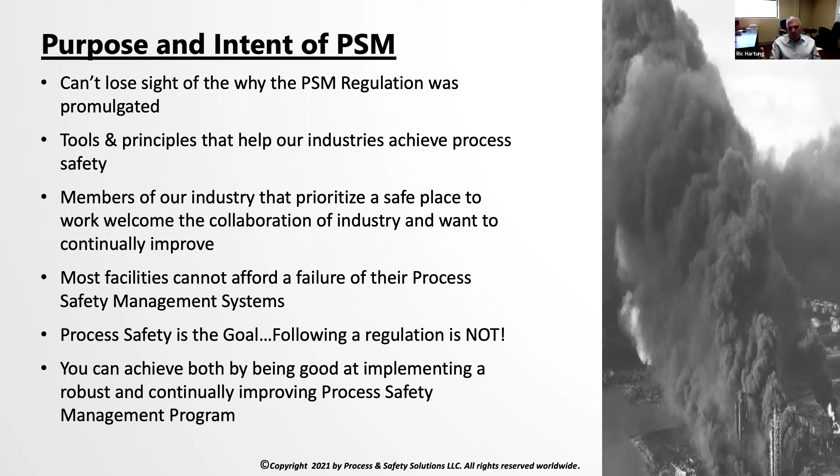And I just wanted to add, Ric, before you go on, certainly agree with Ric that process safety is the goal, but just for context for everybody, my comments will largely be focusing on compliance with the regulation. Just a little bit of a different approach from Ric, and I being counsel for these companies, my comments are going to come from that. What do we have to do to comply with the regulation? Thanks, Ric. Yeah, very good point.

Before we continue on, I just want to give you a little bit of background on this particular case and make sure we understand the case in as much detail as I can provide. I'm not going to go into the nitty-gritty details, but certainly from an overview or 10,000-foot standpoint.

So if you are familiar with a refining process, and I know we have a number of people on here that may not be in the refinery industry. You may be in midstream, or you may be in the petrochem industry, or you may be in the ammonia refrigeration industry. And we're going to hit every one of these industries as we go through this presentation, because all of this applies to every industry, no matter what processes you operate.

But from a Wynnewood standpoint, in this particular case, this involved a refinery, and the typical refinery has many operating units inside of it. You can have the crude unit, the ISOM unit, you may have gas processing, you may have an FCC, a reformer, hydrotreaters, but a number of different operations occur within the refinery. Oftentimes, each of these different operating units will have different operating personnel, and at the same time may be covered individually as a PSM facility.

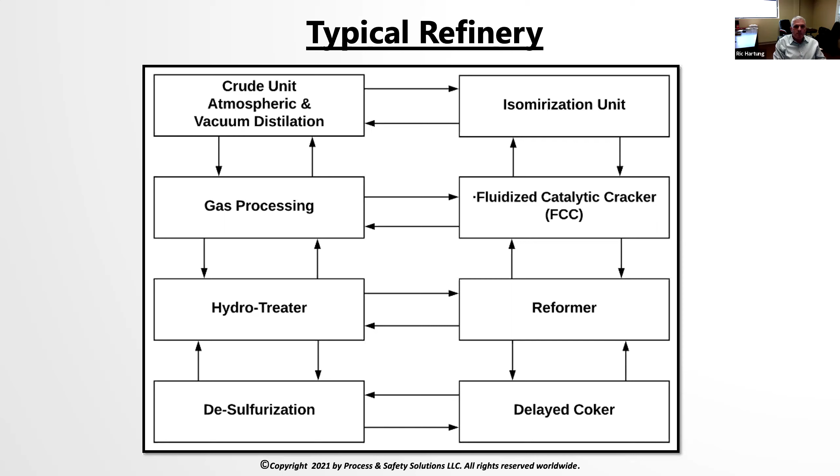Yeah, just a comment on that also for those of you on the call. Rick mentioned it. I know there's a lot of people that may not necessarily be in the refinery business or be familiar with the inner workings of a refinery. I think one of the takeaways from that slide, and really this one, is that whether you're running a chemical manufacturing process or a gas processing plant, this is similar in that we've got multiple pieces of equipment linked together, connected through piping. And so those same questions of where does it begin and end really are universal.

Yep. So this particular case was centered around the fluidized catalytic cracker, or FCC unit. In every typical refinery, as we mentioned earlier, there are several other operating units, many of them PSM covered. The FCC in general contains threshold quantities of flammables, over 10,000 pounds. And those of us who are aware, when we're dealing with PSM, PSM requires you to aggregate all your flammables. So you could have propane, ethane, other flammables within that process. We have to aggregate all of those, unlike EPA's RMP, where it's based on the listing and whether or not you have to aggregate the listed chemical or listed flammable.

So one of the flammables in this particular FCC was a byproduct called refinery gas. It is produced in the FCC. The aggregated amount, again, is the maximum intended inventory. It includes refinery gas because it is a flammable. So you can have multiple different types of flammables, refinery gas being one of those, natural gas actually being another, because they're all flammable.

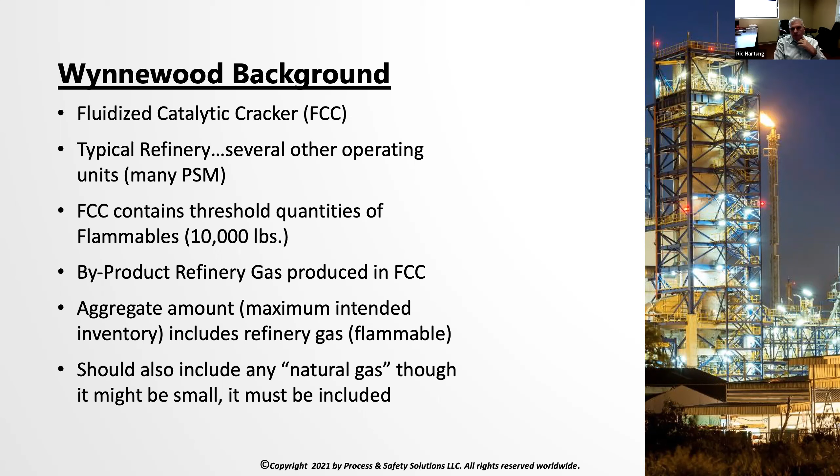So refinery gas is stored and distributed outside the FCC unit, and that's how the Wynnewood refinery was set up. The refinery gas would leave the FCC and be distributed throughout the process through a larger vessel, and we'll get into a few details of that in just a second. The refinery gas is distributed to other locations within the facility, and it's all used and consumed internally on site.

And the refinery gas storage and distribution system in this particular case was not considered PSM covered by the refinery. So the refinery said that the distribution system and the storage of the refinery gas was not a covered process, mainly because they separated it out into a process of its own. And then that process was below the threshold quantity as a separate process, below the 10,000 pounds needed to meet the threshold.

Interconnection was not considered. So what was actually taken into account was, as the pipe left the FCC, that was where the hard stop of coverage occurred. It also relied on a facility siting study on a separate process and how it affects personnel. So as most of us know, as we do a facility siting study within a facility, we're looking for the effects on personnel. We don't always look at the effects on other equipment and other processes within that facility.

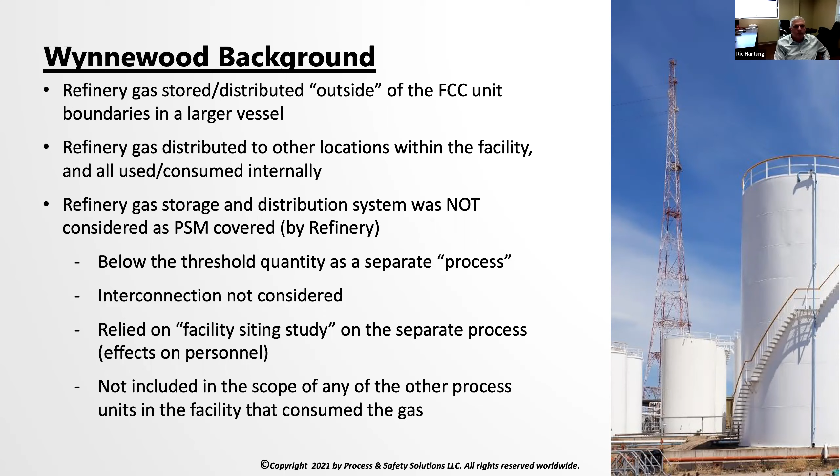So this kind of breaks it down in a little bit more detail. You have the FCC unit or process unit within the refinery. Again, the refinery gas came out of the FCC, went into a larger vessel, and then from that vessel, it was distributed to various locations, maybe flared, plant process heaters, plant utility boilers. One of those particular process pieces of equipment is the Wickes Boiler. And this is where the whole issue centered around in terms of this particular case and this particular incident.

The Wickes Boiler essentially received refinery gas. It would burn that refinery gas, produce steam. That steam would be used not only in the FCC, but throughout the other process units as well. The Wickes Boiler itself was within the physical boundaries of the FCC. May not have been a part of the FCC, but was within the physical boundaries of that process unit itself.

Also next to the Wickes Boiler, you'll see I've got a set of lines there above. That was a major pipe rack containing other HHCs and flammable materials that run through them. So what really occurred here is the fact that this boiler and the explosion could have affected those major pipe racks or piping systems that run through the facility.

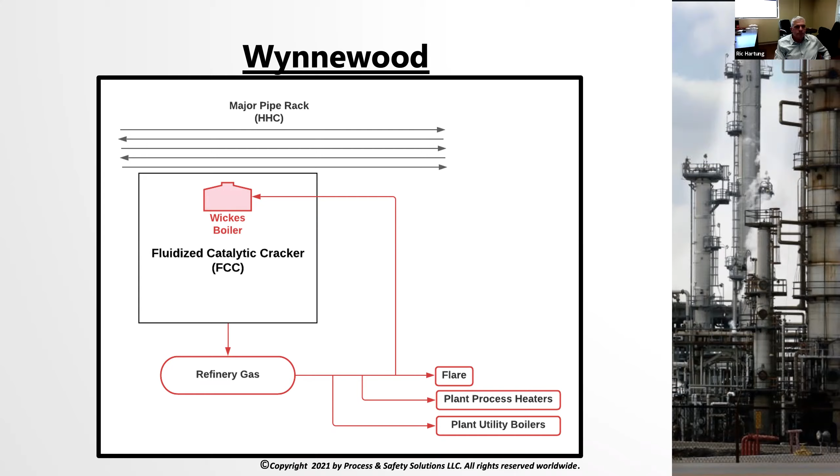Again, one user of the refinery gas was the Wickes water tube boiler, which was located in the FCC unit boundaries. The Wickes boiler again provided steam to the FCC as well as other process systems and units. And we know based on the documentation in the hazard analysis that the loss of steam could result in an upset of the FCC itself. And again, loss of steam that was produced by the Wickes boiler. And also the Wickes boiler was located next to and nearly under a major pipe rack containing large amounts of HHC as well.

At the time of the incident, the refinery was down for a turnaround. So it had been down for, I believe, a couple of weeks or more already. That boiler needed to be started back up because they needed steam for decontaminating some of the equipment to continue their turnaround. So their plan was to restart the Wickes boiler, to produce some steam using natural gas, not refinery gas in this particular case.

And Rick, on that, does that matter, right? If at the time you're not piping in RFG, instead you're using natural gas, which was not created by the facility, from a PSM scope analysis, is that important, whether at the time you are using it or whether it's just piped, and regardless whether it's coming in or not?

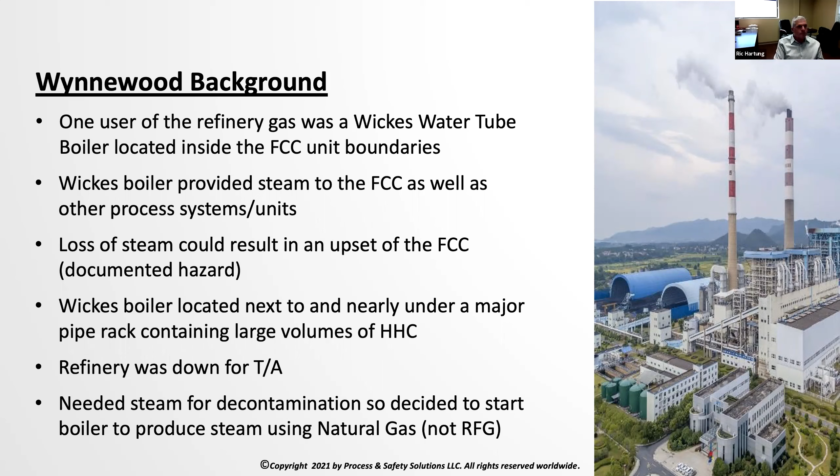So again, some more background is typically there are no HHCs in the boiler firebox. That's what we want to make sure does not happen. They're totally combusted. So from the point at which the gas comes through the burner tip, that gas should be almost totally consumed at that point in time. So we would not expect any HHCs within the firebox itself.

However, and I think this is what needs to be emphasized here, there is the potential for HHCs to be present. RAGAGEPs such as NFPA 85, and most of you, if you're in an industry that uses boilers of any type, you should be familiar with NFPA 85. It's dedicated to address this potential exactly, making sure that we have those systems and controls in place to ensure that the firebox does not contain an explosive environment.

In this particular case, this boiler did not conform to NFPA 85 requirements. All of the lighting processes and gas control were all manual. So the incident itself was gas or HHC built up in the firebox. It resulted in an explosion on September 28, 2012 that resulted in 2 fatalities. As a note here, there was a previous incident involving the same type of boiler, same Wickes type boiler, in another area plant a year and a half, 2 years prior to that. In that case, there were no injuries, but there was damage to the boiler itself.

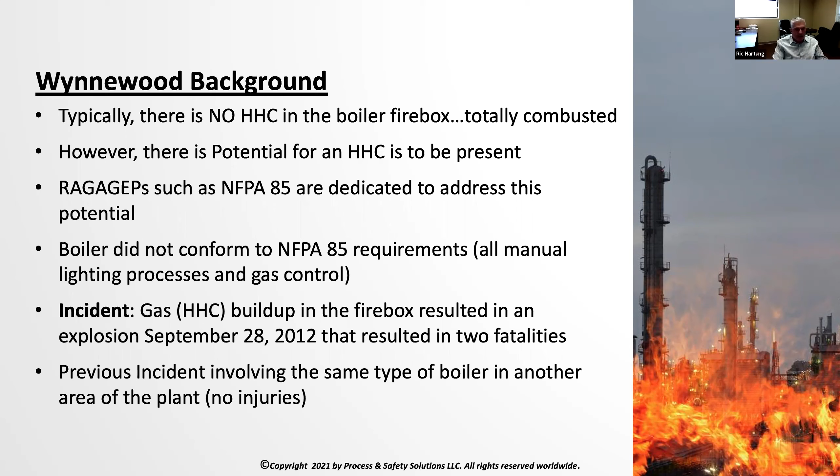So in this particular case, OSHA issued 9 PSM citations relating to the Wickes boiler. All were classified as serious, and multiple citations were also classified as repeats. The citations were challenged by the employer, mainly on the grounds that the Wickes boiler is not PSM covered, not part of the process. The boiler does not contain an HHC, and the refinery gas distribution system did not contain the threshold quantity of HHCs. Also, the employer challenged the repeat classification based on the new corporate ownership and organization. The ownership of the facility had changed approximately 2 years prior to this incident.

Ric, can you explain, given your involvement in this case and drafting the citations, the internal process at OSHA for getting these citations approved and issued? Was there any pushback or hesitation specifically relating to PSM applying to this boiler? Well, I think in general, Robert, when a CSHO does an inspection, they'll present what they believe to be legitimate citations or areas in which they have concern. Normally that will go through some type of management within OSHA itself, the area office, then the regional office. There's always some type of review that occurs.

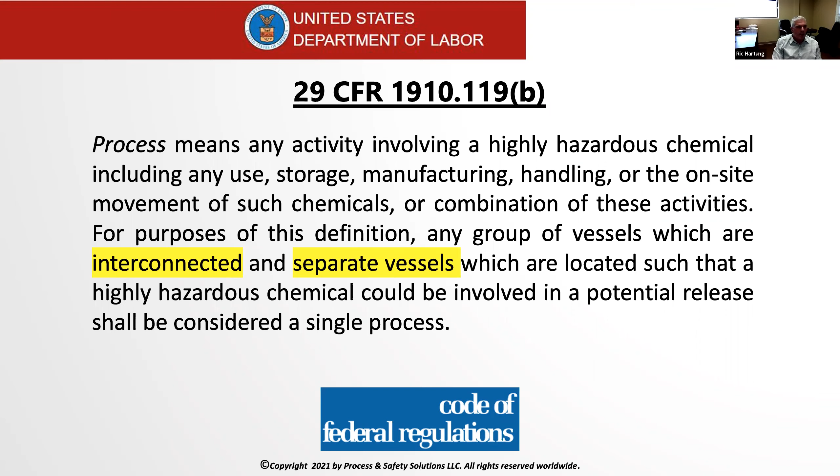So as Ric said, it is challenged by the employer. First goes to an administrative law judge or an ALJ. The ALJ finds PSM does apply to the Wickes boiler, finds that boiler is both interconnected and located such that an HHC can be involved in a release. So here it finds both elements are met.

It also, and this isn't going to be the focus of this presentation, but just for context, the ALJ also vacated the repeat classification based on, Ric alluded to it earlier, the change in ownership, and looking at the substantial continuity test that found that enough had changed, especially at the EHS level and management level, that these should not be classified as repeat. Again, we're not going to go into that in more detail today. If you have questions on the substantial continuity test or that repeat classification, please feel free to reach out.

So from the ALJ it goes to the Review Commission. The Review Commission affirms the ALJ's decision, finds that PSM does apply to this Wickes boiler. And they go into a fair amount of detail about interconnected. What does interconnected mean? And it's, in my opinion, a pretty broad definition that the Review Commission puts forth, in that they say that if you have an indirect physical link, that is sufficient for PSM coverage.

They go into the difference between the word connected and interconnected, right? They say here the word is interconnected, and we're going to interpret that to mean it can be any indirect physical link. It does not need to be right next to it. It doesn't need to be vessel A, pipe, vessel B. Any indirect physical link is sufficient. And again, down here, just using some of their language, it also doesn't need to be involved with the FCC or the alky unit or another PSM process. If it's got an indirect physical link to that process, that can meet interconnected.

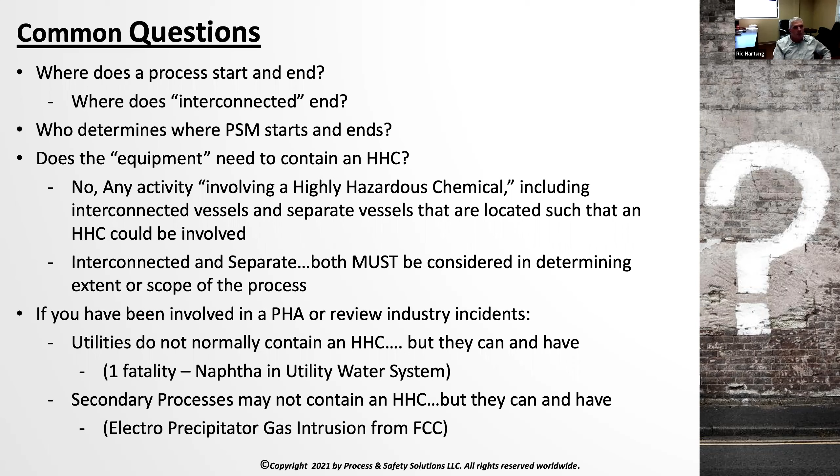Okay, somebody said, I've been out of the oil industry for a while, but while I was in it, we did not consider the tank farm as covered area. Has this changed? I think that goes into the atmospheric storage tanks question again. And hopefully I'm going to cover that here in just a minute. If I don't, let's come back to that one, Marla, and make sure we address that.

Okay. Do you foresee OSHA using this opinion to argue PSM coverage for atmospheric storage tanks? Is that the same? Are we on the same line? Sorry, Marla, my fault. Yeah, that's the same question. Hopefully we'll address that here in just a minute, because that is a very important thing to remember. There are like three of them that are interconnected here. Okay, so I think you're going to address them all. So I'm going to go ahead and finish, and hopefully we're going to address that here in just a second.

All right. So PSM, the extent of coverage, it's not always straightforward, as we're beginning to see. Obviously, there's some things that we have to do within our facility. Not every facility is the same. Doesn't matter whether you're ammonia refrigeration, a refinery, a chemical plant, specialty chemicals. It's not always straightforward. If you have just one process, then it's fairly straightforward: cover all of that equipment within that process.

What if the HHC leaves one process but stays on site? Where does it end? What is the scope? Again, you have to determine that. And if we look back at what we just said in terms of this FCC, they put the hard stop as it left the unit.

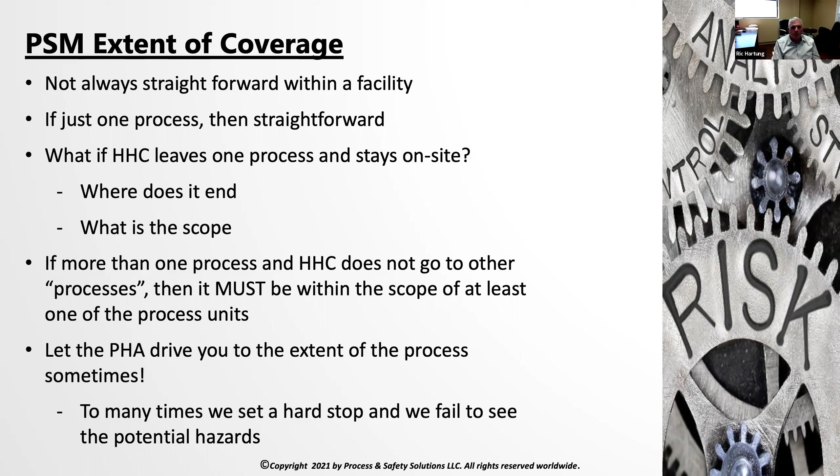Other examples I think that we need to consider here, and this is where we're going to get some discussion. I know equipment that is owned by others, we've already talked about that. If connected, still part of your covered process. I will tell you that we have several clients that have 5 or 6 different companies operating within the same facility, all owned by somebody else, all being operated by somebody else. It doesn't matter. It's going to be PSM covered. Ownership doesn't play a role per se when it comes to PSM coverage.

A lot of times with chain of custody meters they'll say, well, that's a chain of custody meter. It belongs to so-and-so. If it's on site, then it's equipment that would be involved in PSM. Pipelines is another one, owned by others, storage, caverns, etc. Those, if they're on site, still PSM covered. We already talked a bit about ammonia refrigeration facilities with multiple machine rooms or split systems and making sure we're addressing those.

Also, PHMSA, Pipeline Hazardous Material Safety Administration, versus PSM. Who has regulatory jurisdiction? Well, right now, I think, Robert, you can chime in here too. This is a pretty gray area in terms of who has jurisdiction. I will tell you, when you look at the preamble, PSM establishes PSM coverage in your facility based on threshold quantities. If you've got pipelines within the site, those are PSM covered based on the preamble itself.

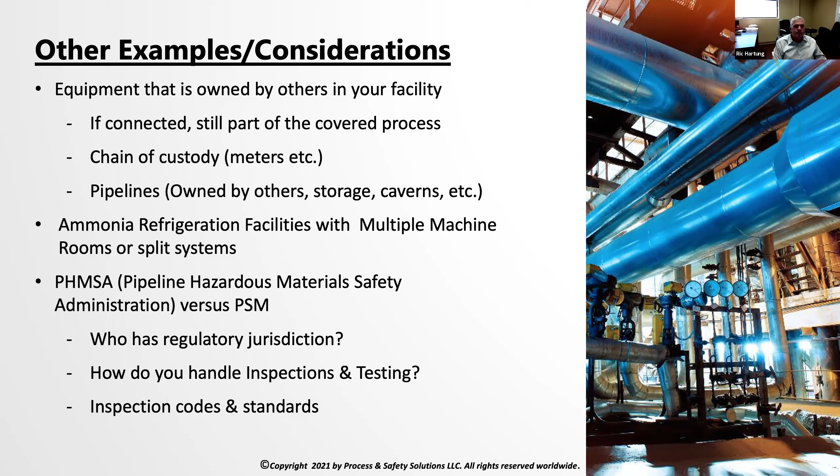Again, we need to look beyond the boundary or unit boundary. We need to consider on-site, and I think that's a very important part of when we looked at the definition of process, it pulled in on-site, so that's important. One location is the definition of a facility, so we need to go to the definition of facility as well. You can divide the facility, but you must look at the interconnectivity within the facility.

Here, I want to talk briefly about the Meer decision. And this will address some of your atmospheric storage tank issues. The Meer decision really was a decision that was made based on coverage. So we know within the PSM standard or regulation itself, atmospheric storage tanks are exempted, right? So that would mean that I cannot use atmospheric storage tanks to establish PSM coverage.

So let's say that I have a process unit that has 10,000 pounds of flammable materials in it. I'm blending materials together and I have 10,000 pounds in that process. Now, because I have established coverage in a process that is not atmospheric storage, I could actually pull in those atmospheric storage tanks because I've already established coverage. But I can't use the atmospheric storage tanks to establish coverage.

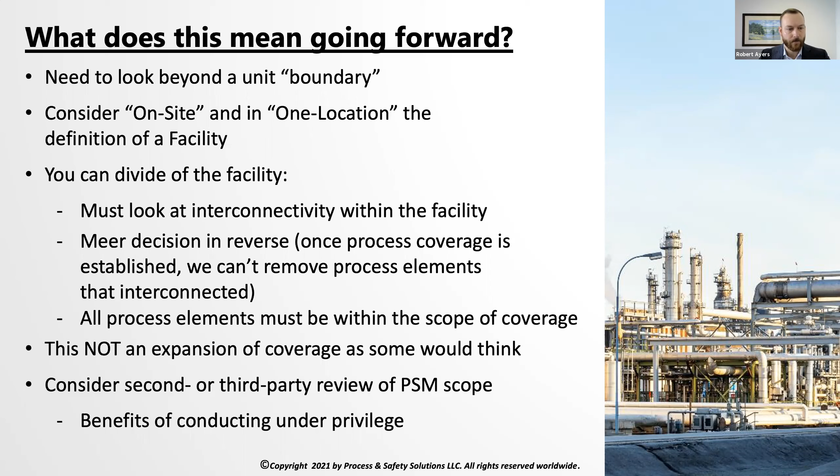Marla, I know we're a little over time, but it looks like we have two outstanding questions. Rick, you addressed it a little bit, but I think it's a really important question. In the example I gave earlier about the boiler sending steam but not receiving RFG, we said an analysis is required to determine whether it's PSM covered. But what if that analysis finds that if there's a loss of steam or anything happens to this boiler, it's not going to create a catastrophic release?

It's not going to create a release of an HHC, but it's still quote unquote interconnected because it still has a mile or 2 miles of pipe connecting steam. So no potential for a release, but still interconnected with the utility. How do you address that, Rick?

Yeah, again, I think you said doing the analysis is the first important part of that, making sure that there are no circumstances or scenarios, credible scenarios, obviously, that would result in loss of steam creating a hazard or a potential hazardous event. That's step number one.

Step number two is determining whether or not a fire and explosion from that particular boiler within the area in which it's located could in and of itself create a release of an HHC; then that would have to be addressed as well. If it does create a release, then obviously you would need to treat it as such and mitigate that risk as well. But just a utility boiler sitting out there operating using natural gas, it's a process of its own. No, it would not be considered normally covered.